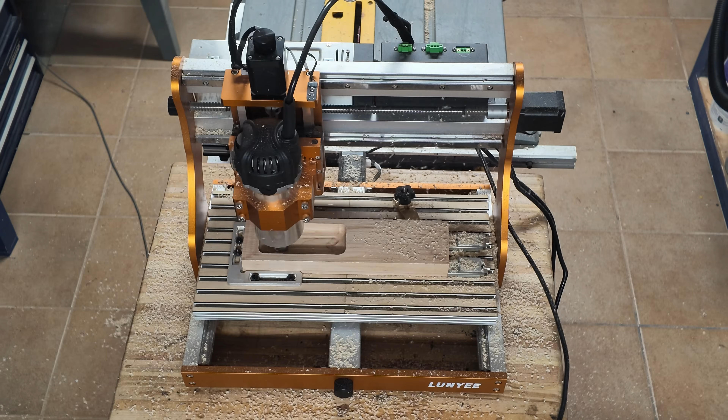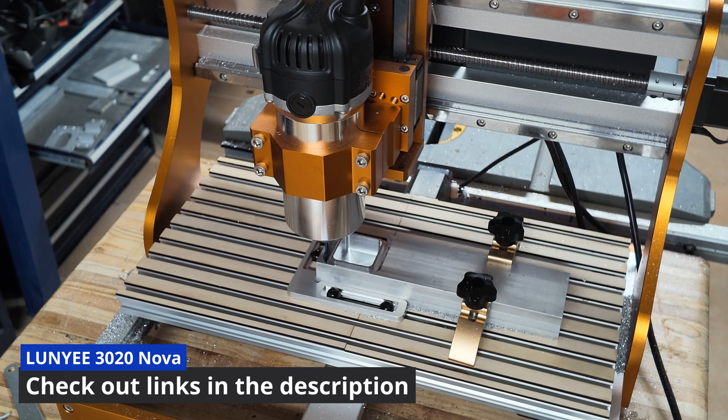I've had the LUNYEE 3020 Nova for over a month now and reviewed it, showing it can easily handle all sorts of wood and even deep cut aluminum projects. If you've been watching my channel, you know I like to make things I can sell, and this machine is firm and fast enough to do it all.

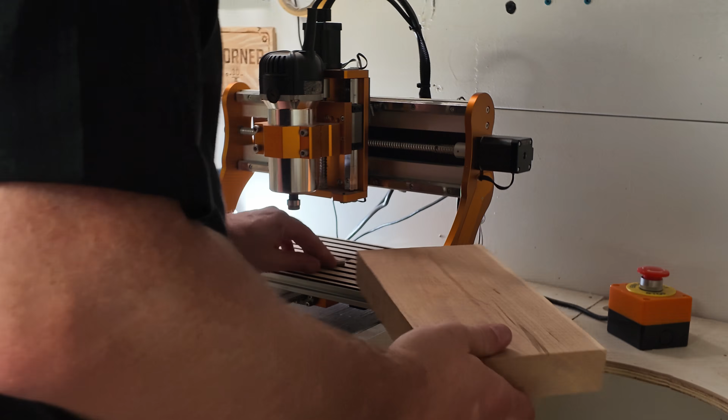So that's why I chose it to make this video for desktop CNC items that can sell. I want to concentrate on a few things that can monetize this machine, either via custom work or artistic pieces.

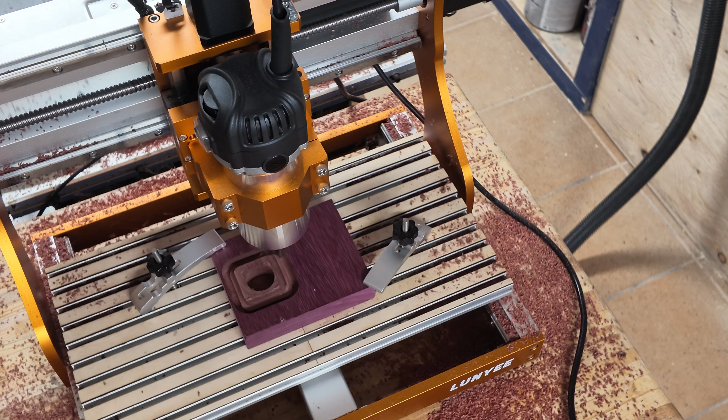On my last video I made a ring box out of purple heart, then made a similar one out of a big block of aluminum. All great potential sale items, but here's something more proven and custom examples.

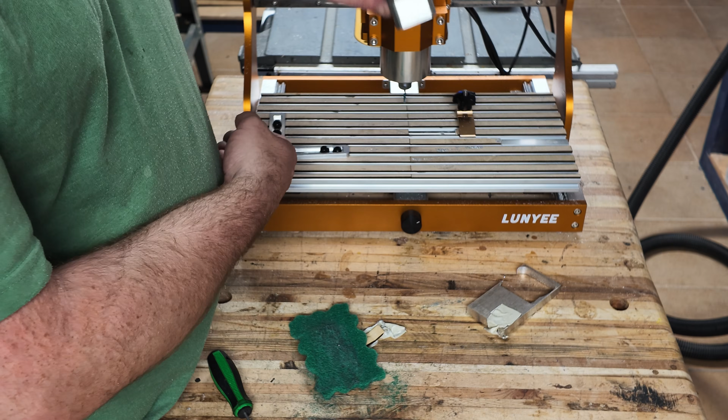At 300 by 200 millimeters, this machine is big enough to make pieces around 7.5 inches wide and nearly a foot long.

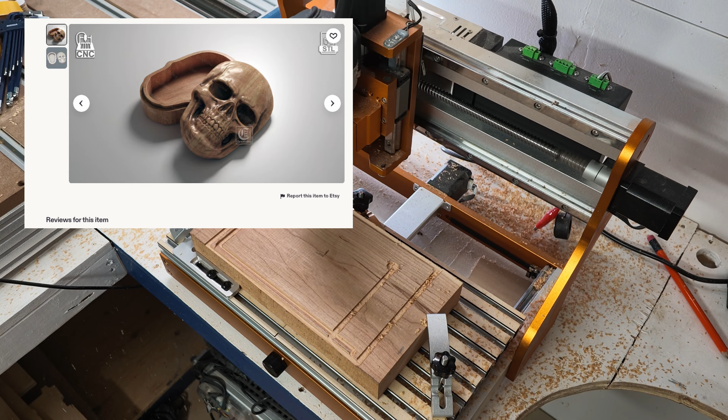I've been buying on Etsy lots of designs that I've made on CNCs in the past, but when it comes to making ones this size, it'll either take a long time, or you better have the power to remove bulk materials fast.

And this is what I want to try to do today on the 3020 Nova, starting with the 1/4 inch flat bit, removing most of the materials in a 3D serving tray.

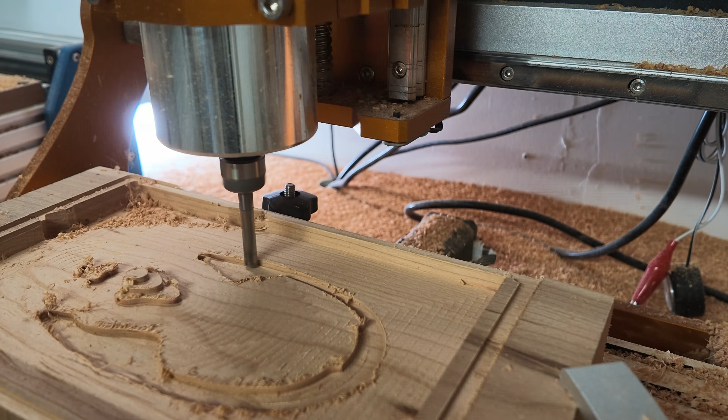I found this design of an oval tray in the shape of a face. That would be perfect for this, as it nearly maxes the vertical ability of my detailed 1/8 inch bit with its depth, which will be a good test for the machine.

For the first step in the G-code creation, I make sure to ignore all details, so it doesn't just do a crude version, but prepares the canvas for the future bit, as fast and efficient as possible.

It should give me a big layered mess, but something the 1/8 bit can easily turn into nice 3D art quick. As you can see, I'm maximizing the use of my piece of cherry, enough that I had to redo my program at 95% scale.

I wasn't taking into account the thickness of my bit enough.

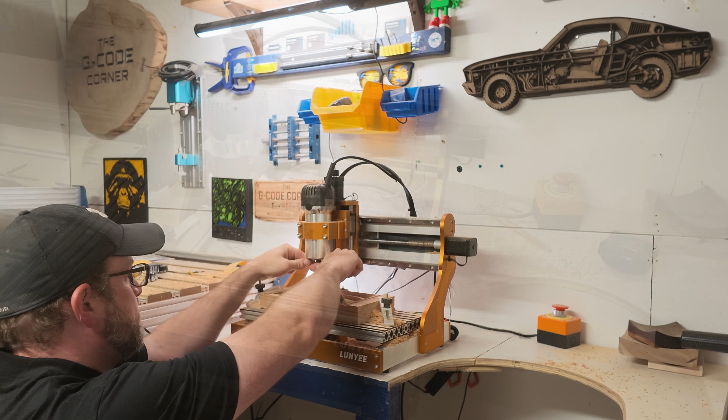Once that's done, this is where I take out the smaller, round bit to clean up the detail in an operation called parallel, where it runs line per line, getting all the 3D details down from the mass of material removed previously.

This is very fast, takes about 10 minutes, saves a ton of time and broken bits from doing all the bulk with the small bit.

After that, since I've added tabs to keep the pieces attached to the wood, I have to give the sides a quick sanding, and it's ready to finish.

I've sold many pieces of CNC art so far, as well as laser engraved art, and it's all from files I buy on Etsy, with full commercial rights.

It's a great product that's easy to store, make multiples of, as long as you can manage the CNC time. The costs are super low.

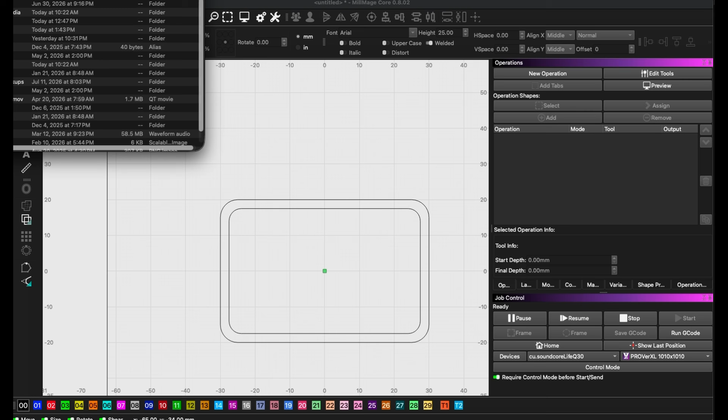I designed this quick and easy shape in MillMage, LightBurn's company's CNC app, designed to be cut on my slab of 6mm aluminum, the perfect thickness for this.

I split the operations between different files, as I'll be changing tools at some point also twice.

First, I carve out the middle pocket, the deeper part minus the text and logo, and in the same operation I cut out the keychain hole with a drilling operation.

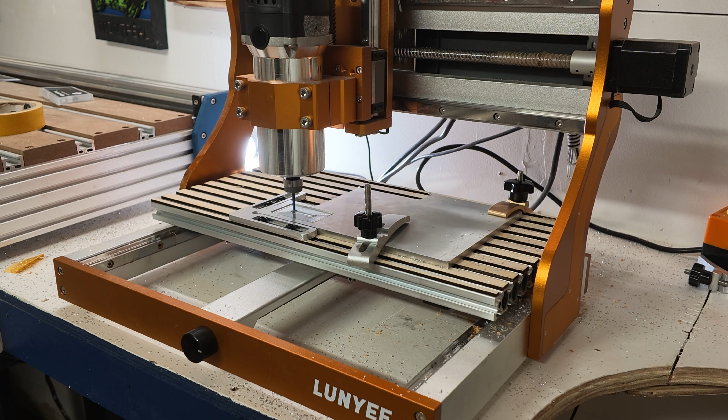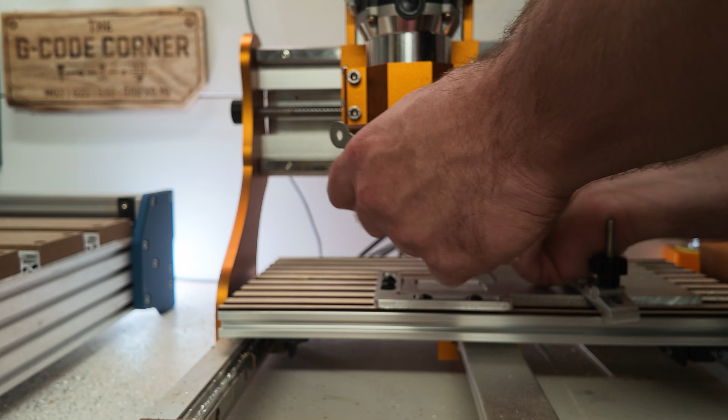Next, even if I'll be back to this bit later, I switch to the V-cut bit to carve my logo, because I want to carve on a stable piece of aluminum, not the cut keychain that will be loose once cut, which is why I keep it for the last step.

The logo is coming out nice, but seeing the sticky chips of aluminum, maybe I could have gone deeper or just faster. Aluminum can do that when it heats, and it heats when overworked or being worked too slow.

As you can see though, it basically wiped off with my finger, so no issue there.

Next, back to the flat end 1/8 inch bit. I cut the outside hole which goes around the keychain hole in a rounded shape.

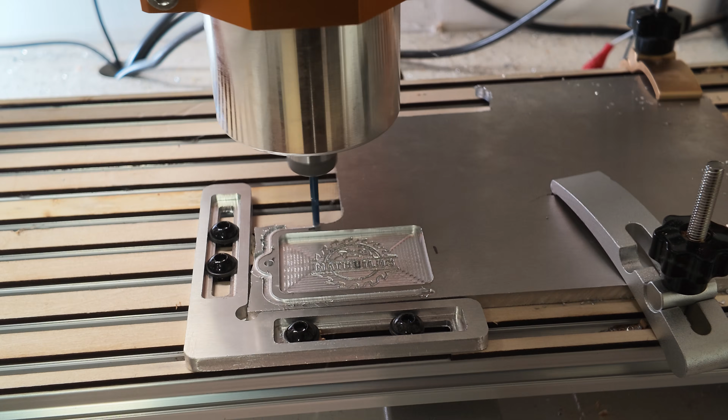For this, since I'm cutting full width of the bit all the way down, I'm taking less depth per cut than I was in the other step.

It's still done super fast, as the sidewalls are awesome, ready to go after sanding the edges barely to avoid them being sharp.

It looks awesome. I'm going to use it to help not lose my dust collection controller, and it's perfect for an example piece to put on the marketplace as an example.

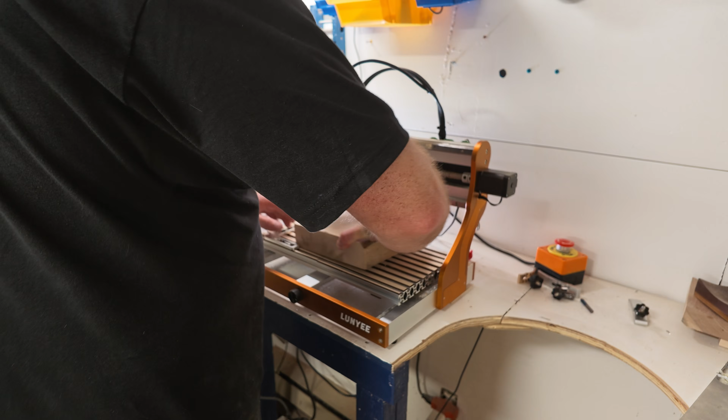The next one could be my most profitable one. It's a climbing hold for indoor climbers, an increasingly popular sport where many people want to practice at home using the very thing I'm about to make.

From this thick piece of maple that's actually a bit too thick for this, I'll make a piece that can make more than the 10-foot board cost.

Since I don't want to use my planer for such a short board, I'll use this machine's power and speed to my advantage, using a flattening bit to remove the 8mm extra I don't need.

In 4 super fast passes of 2mm I was done, and my piece of wood is now flat and ready to make my piece.

I'm going to do the same parallel step I did earlier on this, which is why there's so much material left.

This build maxes pretty much the machine, from the Z carriage height to the typical bits that you'll find in 1/4 inch.

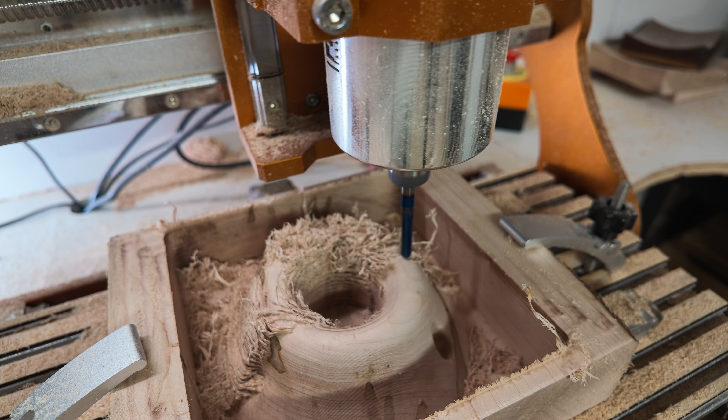After a quick sanding to make sure it's really smooth for the fingers, no cheating, no extra grip for the climbers, I set it up on my ceiling beam where I can now get some workouts in a totally safe area over my router table.